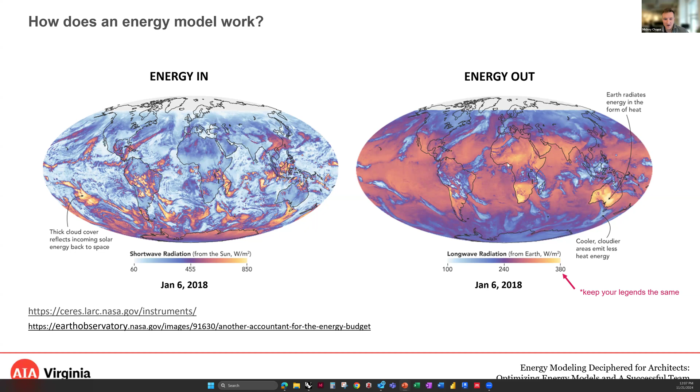A quick graphic tip as we talk about energy processes is I would always recommend to keep your legends the same. What it looks like in this graphic is that the energy out is much more significant. So we're going to touch on that with our energy models, but I just wanted to make a note of that. So how does an energy model work?

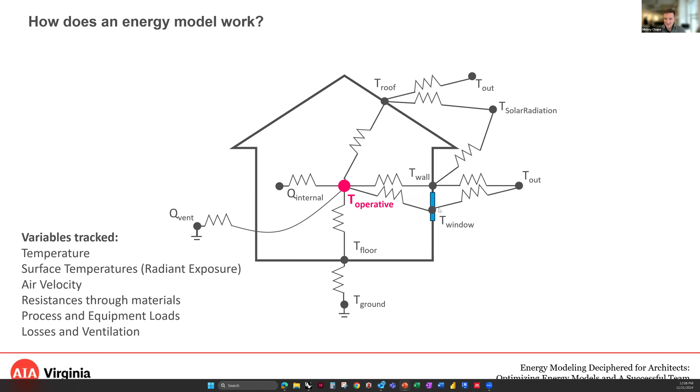We talked about why it's being used. We'll see how it gets used in the design process, but this is a quick graphic to show that an energy model is just simplifying all of the different physical interactions that are going on, whether it's the air temperature inside, the resistances that are going across your building surfaces, and then all aggregating in. And that's including the radiant temperature, the wind speed, the solar radiation that's coming from the sun passing through our windows.

And one of the really important parts here is that it's being reduced to planar surfaces. All the windows are in line with those planes. If you try to make a curved geometry, the software will probably reinterpret that as a bunch of triangulated meshes, and it gets really, really challenging. So an energy model, kind of fundamentally, is not a design model.

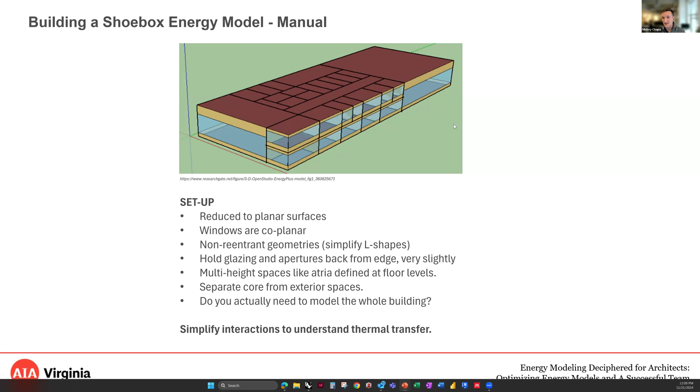There is some processing that has to happen, whether that is done manually by some of the shoebox tools that we're going to show today, or whether that's done by more sophisticated embedded modelers that are now coming on the market. For instance, one of the tools that we're going to look at today is Pollination. This is a development of, again, you can see the Open Studio interface, and this program will work to adapt to different Revit geometry. So this is another path that's out there.

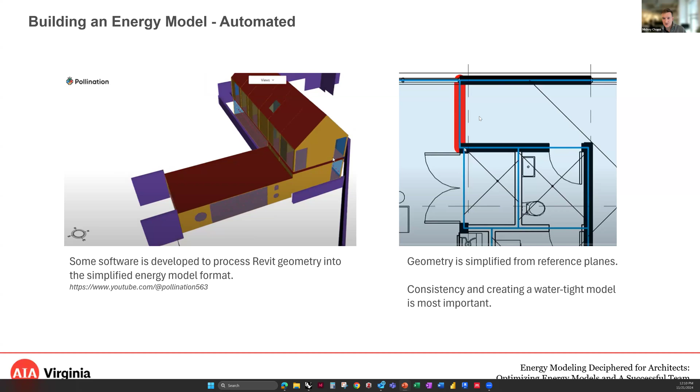We're going to be looking at a much simpler version of this, just to try to get used to some of the tools. And then a key phrase as we go through these models is this term adiabatic. So when we're looking at doing a shoebox model, it's very important to be able to adapt the scope of our study, right? Like, do you need to do the whole model? If you have a 4/1 apartment complex, maybe you just need to do a typical unit at the roof level or at the podium level, and then maybe one also in the middle.

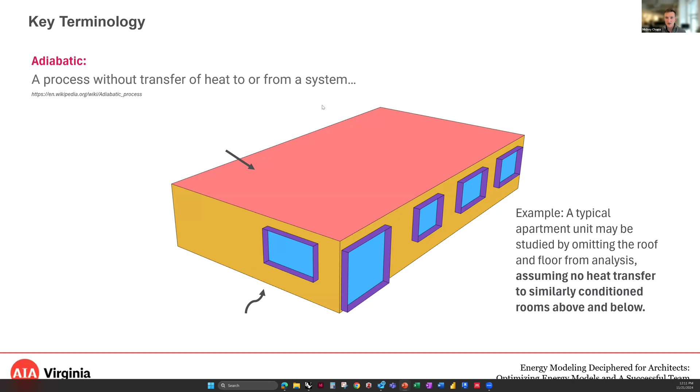And then you can start to test different assemblies as opposed to running a full model, because it takes time. There's actual process time to take into account as you increase complexity. So simplifying that, and maybe turning off some of those spaces. So for instance, this term adiabatic is deciding which walls or surfaces you're not going to be including, that are negated from energy transfer. So it's another thing to think about while we're building a model.

And the other software that we're going to look at today is Climate Studio. I think these are probably comparable in their functionality. Climate Studio has a little bit more intuitive of an interface, whereas Pollination is free and allows you to evaluate the same quantity of information or types of analyses.

So we're going to go through. We'll have to provide these links to folks otherwise, but I'm going to go through the download splash pages for each of these products, and then also these are some other learning resources I'll highlight before we get into our demo. But why are we doing the shoebox model is always key to remember, and also key to deciding on what tools we want to use, and what avenues are opened up for us by the decisions and which tool sets that we use.

So I think, coming from an architectural background, it's very valuable to me to be able to understand where the energy is being lost. Can you connect it spatially to the ideas that you're presenting? Is it going out of these windows? Is it going more out of the floor? For this particular example, I've turned the floor, the ceiling, roof structure off, so we can just check the different faces or walls.

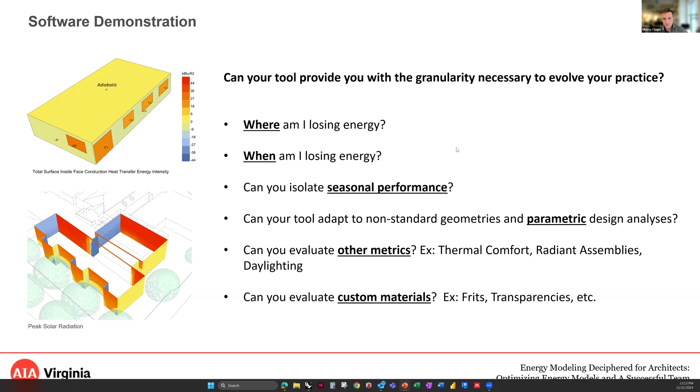Okay, we'll move on to our energy model now. I'm going to flip open some of our resources. Are you all seeing the Climate Studio website? Yes, we see it. Excellent. Okay, so this product is being used by some very sophisticated energy modelers, such as Atelier Ten, other teams, and it comes with a very easy to use interface, in my opinion.

You would go to a download. I would recommend downloading version 2. And I'm going to provide a script that is used. This software interfaces with Revit and with Rhino as well. The Revit exporter is just for daylight, and all of the other energy analyses are performed in Rhino. So I'm going to open up Rhino, and hopefully you're familiar with Rhino and the Grasshopper interface, or maybe someone in your firm, a younger staff might be.

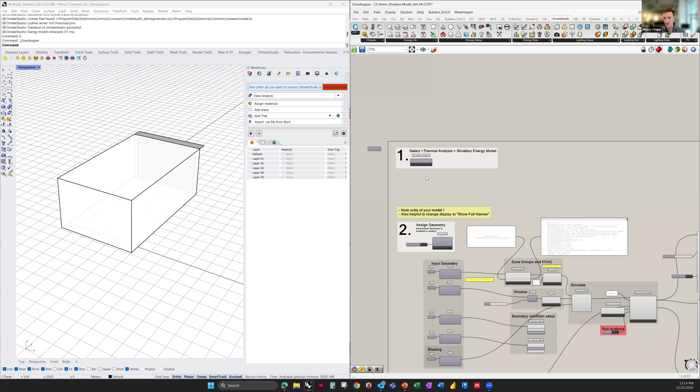At the top, hopefully this is large enough. I'll expand it so we can see. So we've opened up Rhino, we've opened up the Grasshopper kernel inside of it, and we see the Climate Studio. There's a lot of different parts and pieces, but conveniently, this software has a whole template. That's what is included in the top left. You can select the analyses that we want, and there are a lot of different things that we can study. For today, we're looking at thermal analysis, and there is a shoebox energy model. If I select this, we're going to see all of this spaghetti populate onto our dashboard.

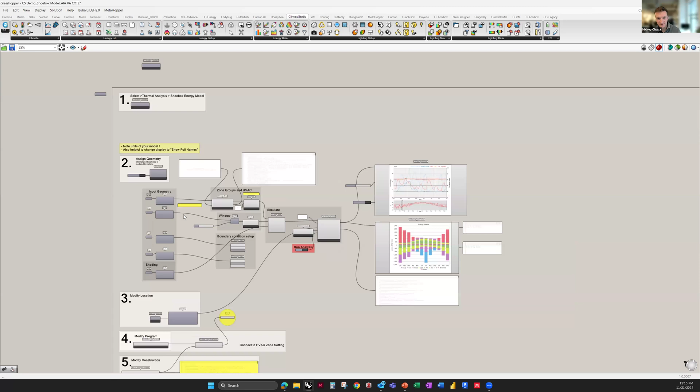Just so you see, very similar. I've added in some other components for clarity in the file that I'm going to share with you all after this meeting, but a couple of high level things of what's included in a digital energy model. Let me go back to our side-by-side view. You have the geometry, the components that you're looking at. All this geometry is baked into this file. We have to assign the windows, the walls, the shading structure. That can be done multiple ways. You can build it up as individual faces, in which case you would have a lot more control over what each of those components are made out of.

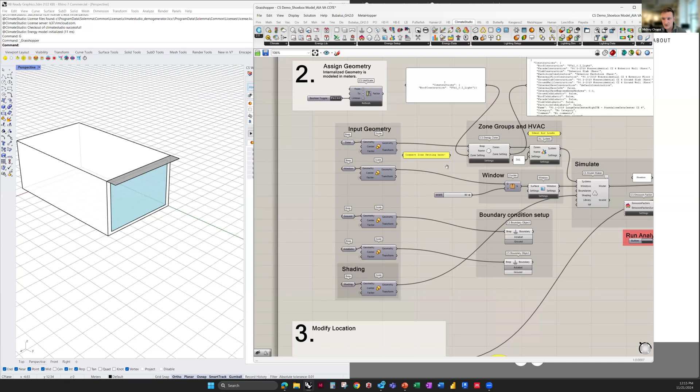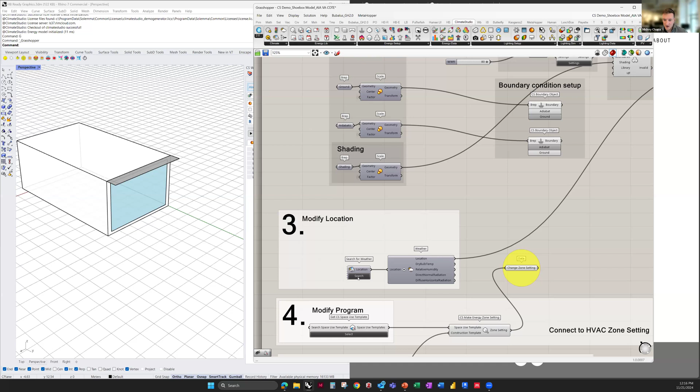But most of these softwares will also have construction sets. We saw that with Sketchbox, so that you could choose an ASHRAE 2019 compliant collection of assembly types, R values and such. And then you also have to identify the location. There is a nice interface where you can click on this button to search for a weather location. Let's say we'll look for Richmond, and we can grab the weather file for Richmond, Virginia. Now that's loaded in.

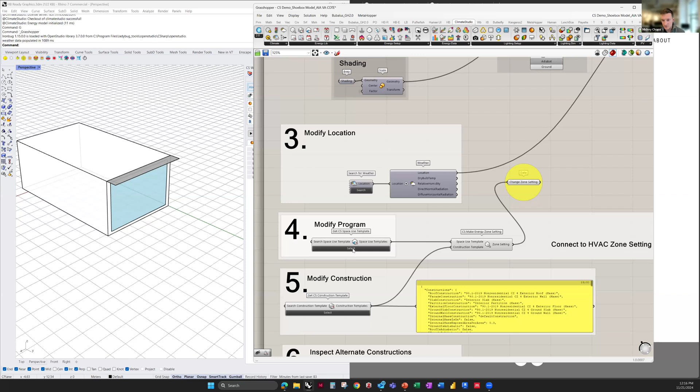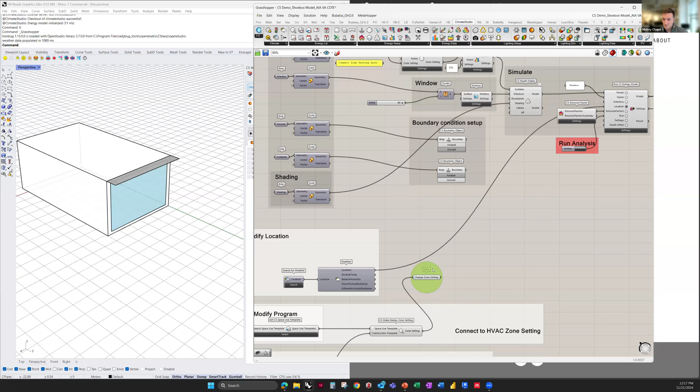We can change the program. For this little exercise, we're going to test just changing a program and what effect that has. We'll do a multifamily residential, and hit OK. And then this zone setting: a lot of these programs, similar between the Pollination software that we'll show next and Climate Studio, have a lot of flow from one element to the next, but so long as you're lining up the names, you can generally search for it and find it pretty readily. If not, there are other tools, YouTube sites that you can look up for the given software. So I've just connected the program that we selected and dropped it into this energy zone.

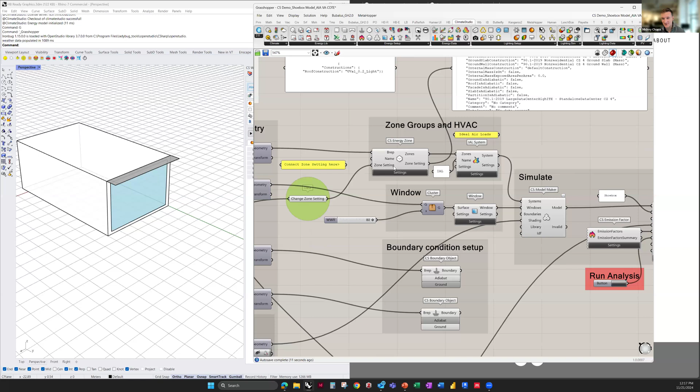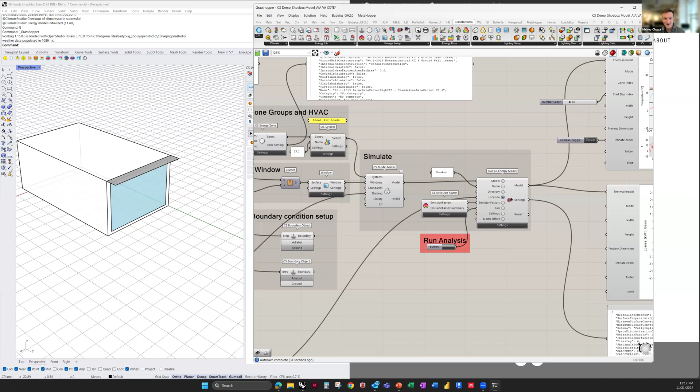If I can't find it, sometimes you can just search for it. So Climate Studio, energy zone, and maybe that pops up with the component that we need. And for this case, all we're going to do is just hit this run button. If it is working, you should get a command prompt that opens up. And in this case, it ran pretty quickly.

So again, within a couple minutes here, we have some test geometry. We can start to look at different performance qualities of this space with a very large window, and its energy balance. So this was the quick note that I made about the globe and the energy in and energy out. So an energy model is balancing losses and gains,

and then for the particular systems that we're looking at in a shoebox setting, if we don't have the exact building systems that we're going to use, that's probably another package that we could look at in one of those other template files. But this is just what they call an ideal air system. So it's assuming no energy is created or destroyed, and you're just tracking the gains and losses across the envelope or across the building systems.

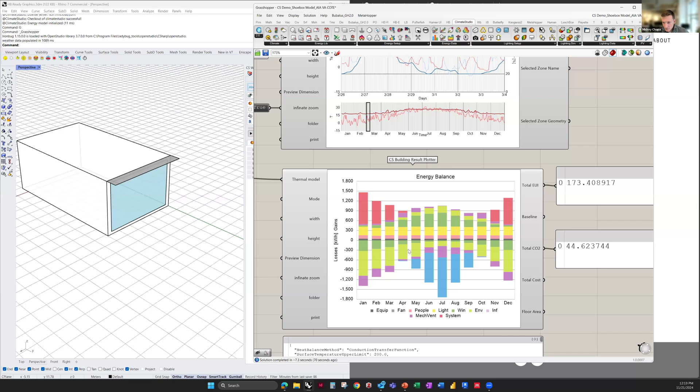And then you can start to identify the biggest transfers of energy. So we have heating, we have cooling systems. In this case, the environment and infiltration should be pretty high for the residence. But now if we compare that, sorry about the back and forth here, this is also probably looking at it in metric. It is looking at it in the metric EUI.

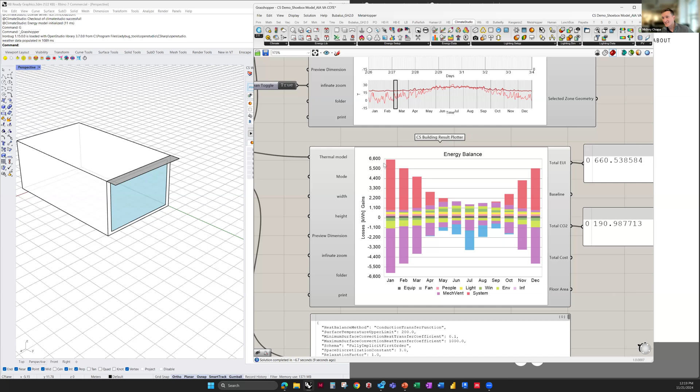However, for the sake of looking at this, we can just compare it relatively if we change the program, let's change it to a science lab. And then rerun it. So this is calculating in the background. And then we can see a much different energy spread. The last one maxed out about 1,500, and now this is saying 6,600. So we have a 4 or 5-fold increase in energy use by program.

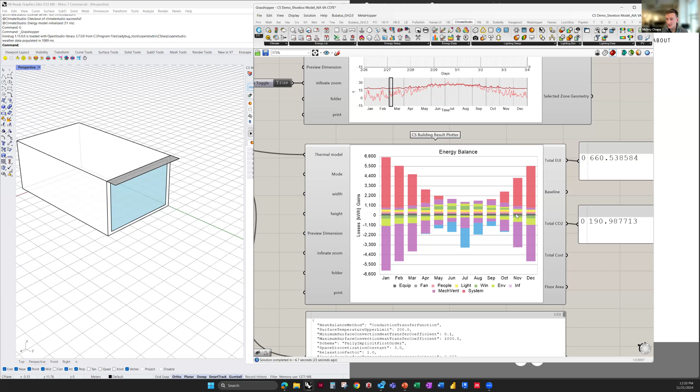So again, things that we know, but now that we can see this, it can help us make recommendations and dive in deeper seasonally and based on different components. So that's Climate Studio very, very briefly. So the next thing that I want to open up is a Honeybee or a Pollination script. So where do we get that?

One last thought on Climate Studio. There's this really wonderful course that's put on by the team that developed that software. It runs March through June. It's like $200 for the full course. Really high level comprehension of sustainable building design. Definitely recommend.

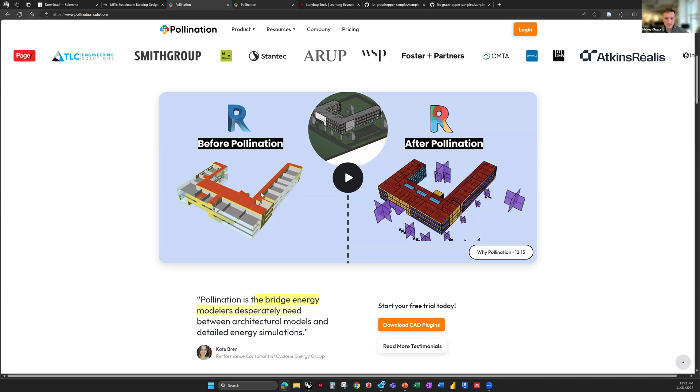Next is this Pollination software. In full disclosure, part of the team that developed this software came out of my office. So I'm very grateful to be a part of this community. But again, I'm happy to share this with you today because the tools that they have baseline are free. And then there are a lot of other things that can be added on with cost. You have to create a login to see this next collection of tools.

But when you log in, there's a download section. When you create a login, you'll get a free trial to begin with. So the Grasshopper plugin is free and open source. Hopefully, if you have students or new hires that are just out of design school, they're teaching this in the universities now in environmental building systems classes, just because the cost barrier to entry is so low.

However, there are a growing number of tools within this group that are available as plugins for Rhino and for Revit, but we're just going to look at the free Grasshopper ones today. And what are we looking at? So in this family of tools from the Pollination set, there's this collection of animals. Ladybug is the climate analysis software portion. Honeybee is the energy software. Dragonfly is an urban energy modeler, if you're looking at district systems, just pretty fascinating. And then Butterfly is a very simple CFD interface.

So inside of this tool set on this resources page, there are some example files. And again, this might be a little overwhelming. This is going to redirect you to a GitHub page where you download it. So not quite as slick as the Climate Studio templates package, but there are a lot more of these scripts that are available online and designed around very specific analyses.

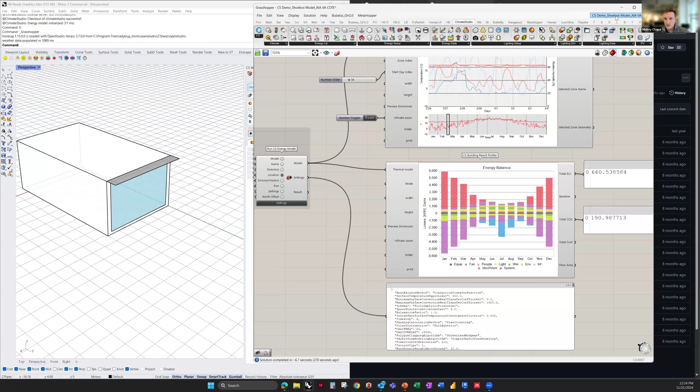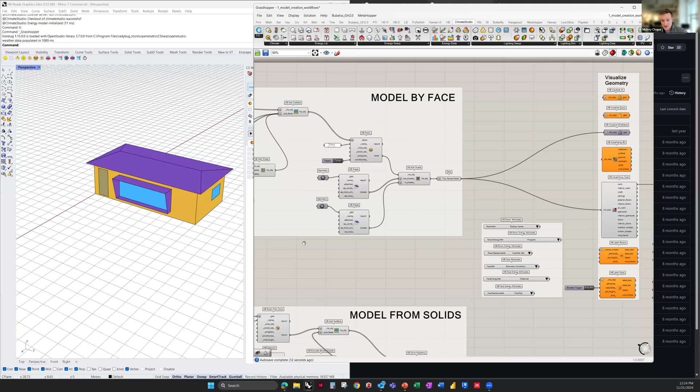So let's go back to Grasshopper in our Rhino interface. And this is the model creation. So just like in Climate Studio, we see the same coloration of the Open Studio faces, so we know that that's kind of running in the background. And we can model that by individual faces, so we can have a lot of control over, this is actually like the walls, the windows, the shading.

And then this is one of the things that I think is really important for architects. We're just never happy with the black box situation. Like some of the other tools that are on the market, you don't know exactly how that is being processed. With software like this, you do know, at the cost of making sure that you are really in control of all of the different pieces, which takes time and experience. But it does even allow you to change different Radiance parameters. So that is the ray tracing software.

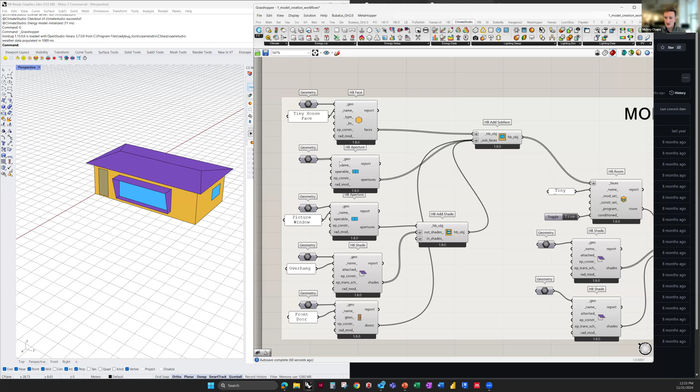Also note on the download, when you download Ladybug or Honeybee, it's going to download Python, it's going to download Open Studio and Radiance, which is the ray tracing and light tracking software that's kind of underneath all of these other tools. And sometimes when you do download it, it may take you opening Grasshopper once or twice as it loads in those different background softwares.

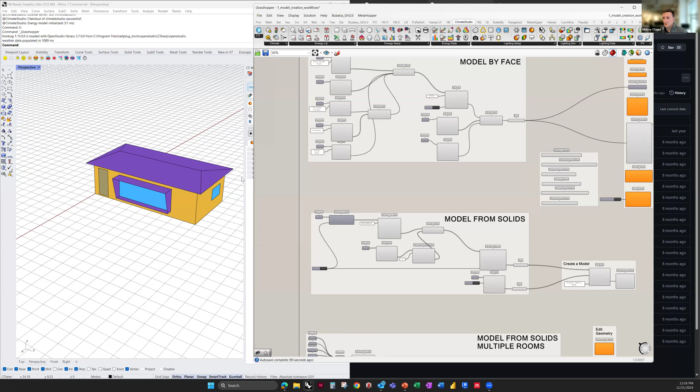So in this case, this energy model, we're looking at one that's designed by face, which is, again, just like plane by plane construction, similar to how we saw in Climate Studio. And then this model from Solids, that is if you just drew a box. Let me see if I can turn this off real quick. If we just had a box and all of these different little rooms inside of it, what does that look like? So again, slightly different collection of geometry that was included in each of these little sample files.

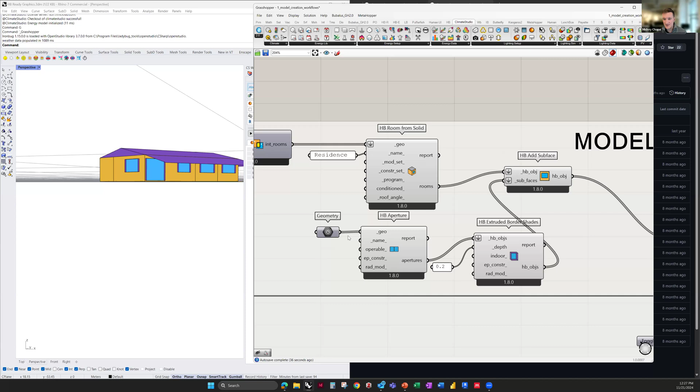But what we're looking at here, just to walk through the spaghetti again, is we have our geometry that's being put in. It's being translated into this Honeybee room object. Similarly, there's this collection of modifiers. So we need to add the location, we need to add the constructions and the program. So these are two different methods for attacking the same questions and the same line of options. In this case, the geometry for the windows is extra planes that are added coplanar with the surface of the box. It's a really important thing.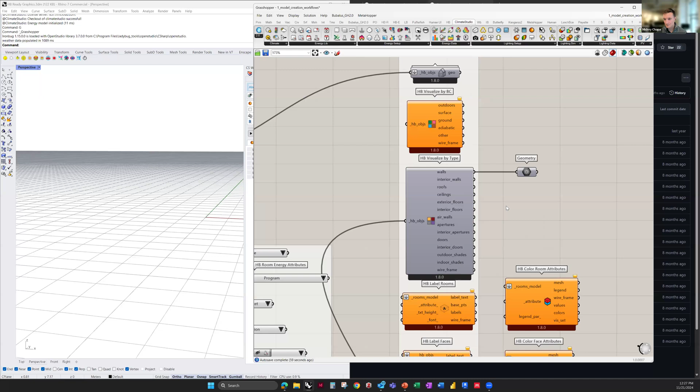And then we can inspect the different elements. So I'm going to go back to, let's see, I just want to make sure that my windows are not showing up. So I'm going to hide this piece. And I just want to look at the walls. So this is one way I can make sure that I know that the windows are being cut and tracked through. So you'll be shared this script. This is a lot to take in all at once, but I just wanted to show you some of the functionality that is available in these free tools.

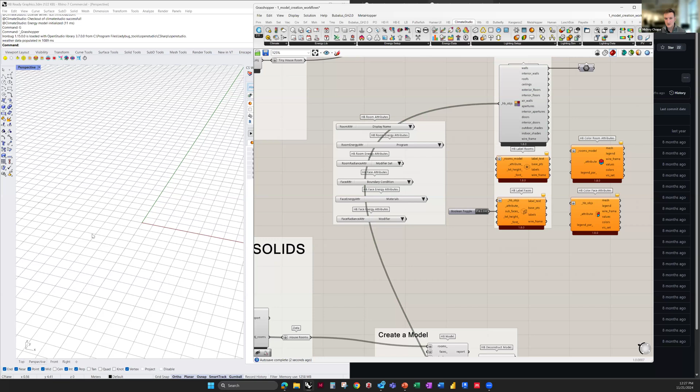And then another method that is presented in this sample file is, how do you do a whole floor? If you're like, okay, well, I've really dialed in different space types, different orientations, then you can connect lots of rooms together and then start to process a whole energy model. In our practice, and we'll talk about this later, we do this very rarely. What we would be looking at are just smaller shoeboxes, like one room, maybe a key atrium or signature space, or a really dynamic space from a thermal perspective.

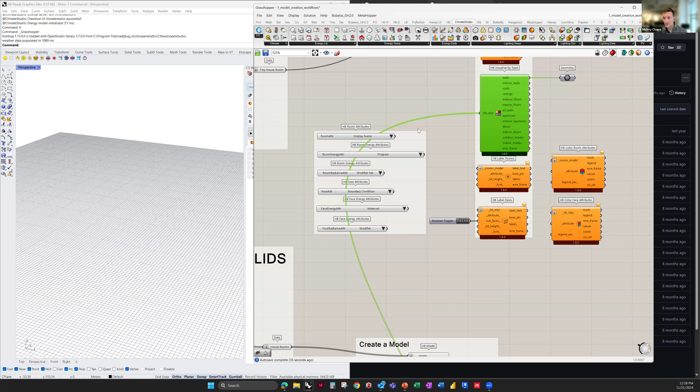So, okay, this is a file set up just to show how you build the model, how you put it together, and you'll get a copy of this. So secondly, now I want to show you how you go through and add some qualifiers, put some adjectives on these spaces and walls and things.

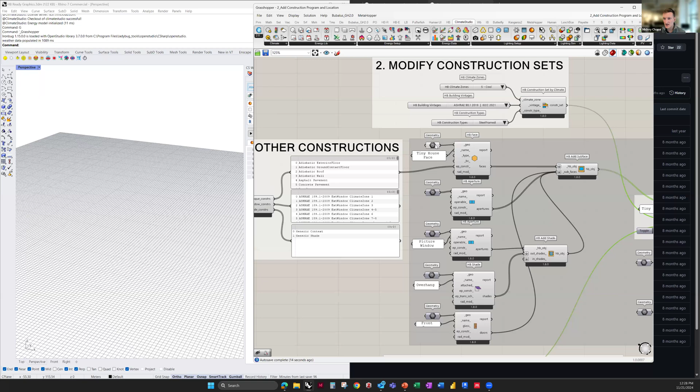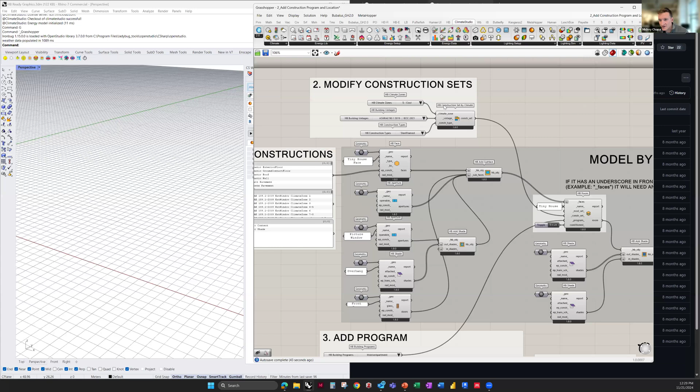So if we were looking at, let's find our model again, just our little tiny house example that was presented. Again, this is a shoebox energy model, and I've just added some comments on here, so if you have the time, you can go through and look at it. But we have the different faces, the windows, and we can add qualities to that. So one of the ways that you can add a characterization of your model is through this construction set.

And within here, I think I was doing a demo in the Boston area. So we can change the climate zone. We can change a building vintage. I think the ClimateStudio tool only had the current ASHRAE model. I think this is a really nice tool if you want to compare an existing building. It has a lot of historical time steps in there, and then also the construction sets.

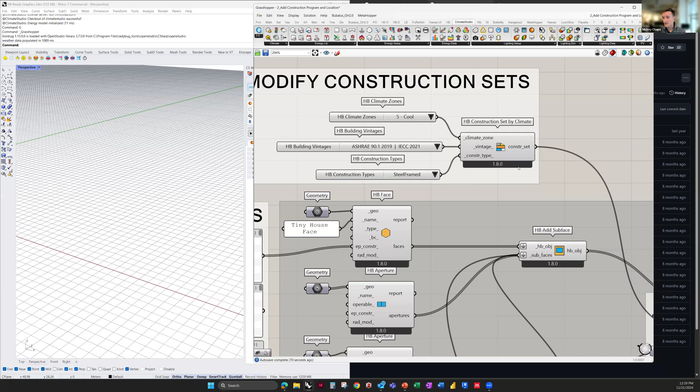So a little less clean of an interface as compared to Climate Studio, but again, I think very valuable in terms of its cost, and it's free. So as we track through here, we have some different properties. We have construction sets. We can change the program. In this case, we'll do the same analysis. I have this one set up so that we should be looking at it in imperial units.

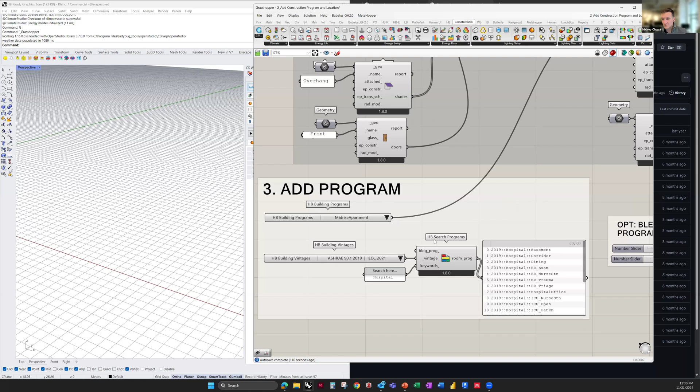And the Honeybee tool set also has this search feature where you can look at all of the other programs. It kind of works the same way. They have search programs, search construction types, search individual materials. So if you dive in, you can look at building up your own assemblies, and having the facility to do that I think is very, very helpful.

So then all of those constructions and programs get applied at the room level. And then shades can be added. Context buildings are also included in the shade. You can choose whether they're attached or detached. Okay, so that is how to set up the model. And then the simulation, this is, again, probably in the weeds. Hopefully you'll have a chance to go through and look at some of these other resources.

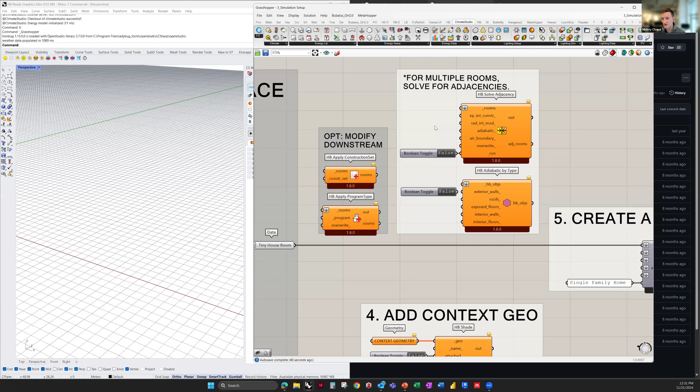If you had multiple rooms, you would have to pass it through this adjacency component, so the software can know which rooms are touching, and then you can decide, maybe it's a multi-zone open air cafeteria or large atrium space, whether or not it has an air boundary. Does it actually have a wall in between or not? So this allows you a high level of flexibility and functionality to dive into how your model is working. Again, adding in shades.

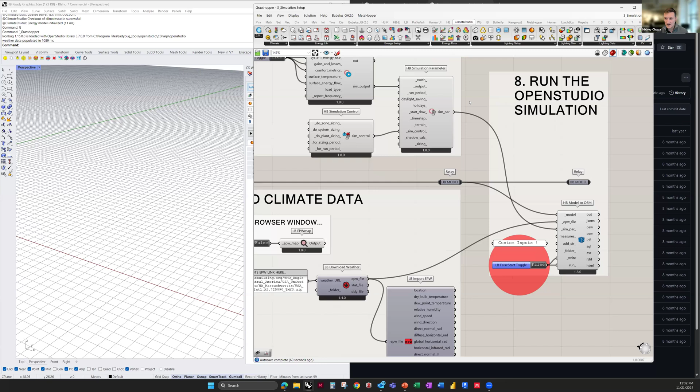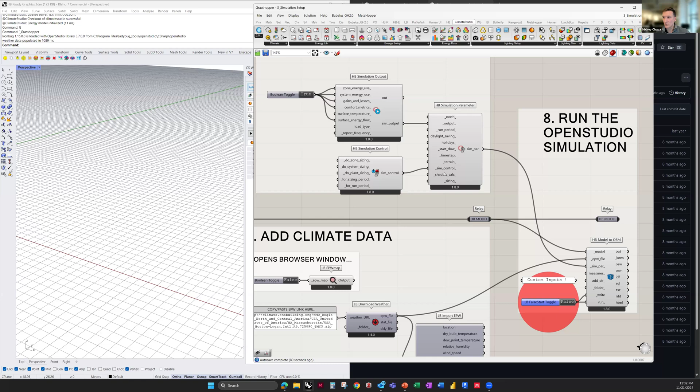So you go from a room into a model, and then it gets passed into this OpenStudio model, this OSM feature. And in this case, you can control not only very standard generic processes, but what you want to analyze, whether you want to do the zones, or if you're specifically looking at the energy flow. I showed that graphic of heat flow through windows or heat flow through walls. So you can choose whether or not you want that included. Maybe this is too much detail for your particular practice, but I do want you all to be aware that this is out there.

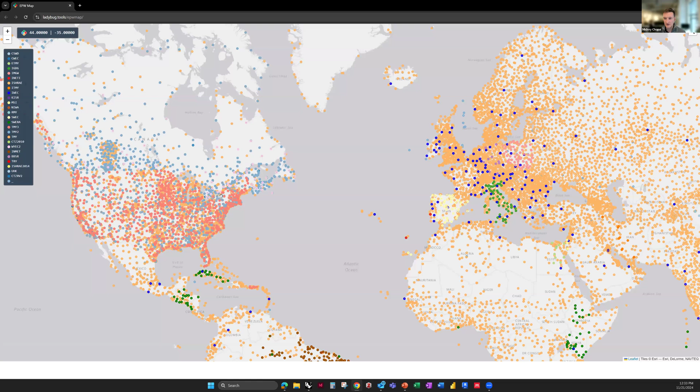This is also a pretty interesting thing. Climate Studio had a nice graphic where you could just search for climate files. Ladybug has an online service; this should be opening up my browser window to a map of climate files, hopefully quickly. There we go. So we could click on any one of these places anywhere in the world that have documented their climate data. Another really useful feature. And then you can inspect it with other Ladybug tools for hourly and monthly averages, that sort of thing.

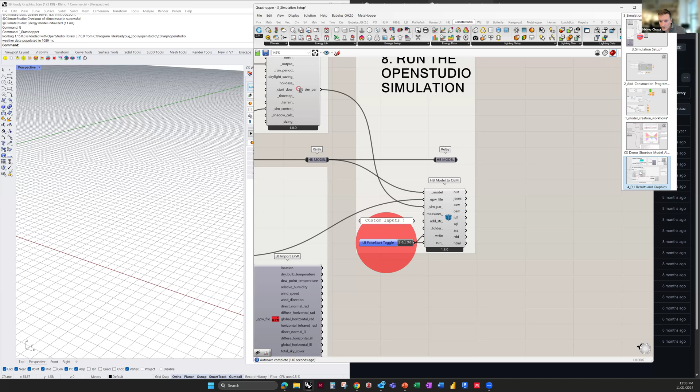So that's the setup, and then we could run it, and we'll look at it as we come to the end here. You can see I have an analysis that's already been run, but we set this to true, we run it, and it does the same thing.

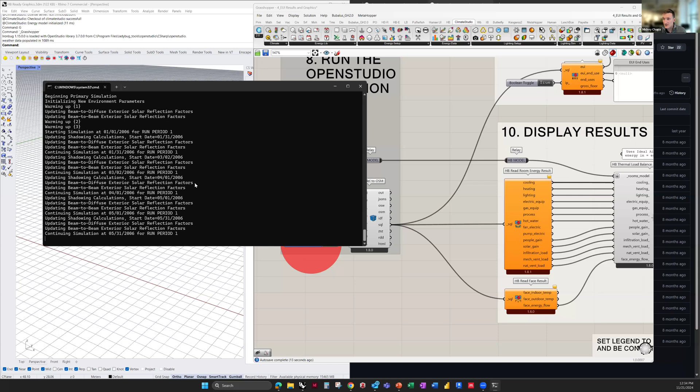I can turn it off, I can run it again just so you can see as an example. And again, it's kind of loading everything in the background. Hopefully this doesn't take too long now that I'm also streaming this video here for you. But yeah, you can see again, it's processing, it opens up a command prompt. And then, still thinking, here we go. So same thing.

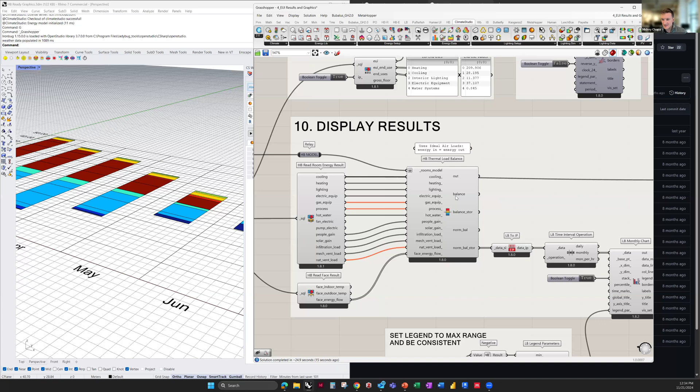And then this tool also allows us to really dive into what are each one of these loads, and how much are they. Honeybee also collects the data into these little packets where it works kind of like a database, if you're familiar with database design, where there's a header and then a long list of data items. And so if you want to look at the data, it comes in as this hourly collection, 8,760 values, and that's every hour of the year, and some information about it.

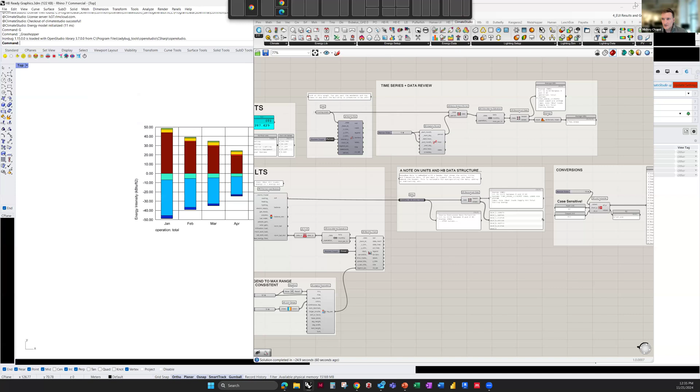And then these are the loads in particular that are coming from the cooling in kilowatt hours. So, you could use that, compare it to how many kilowatt hours you're collecting from PV panels. So a lot of functionality within here. There's some other little notes in the margins, but when we look at our model, then we can see the same thing. Let's see if I can make this full screen and have the same level of detail pulled from that.

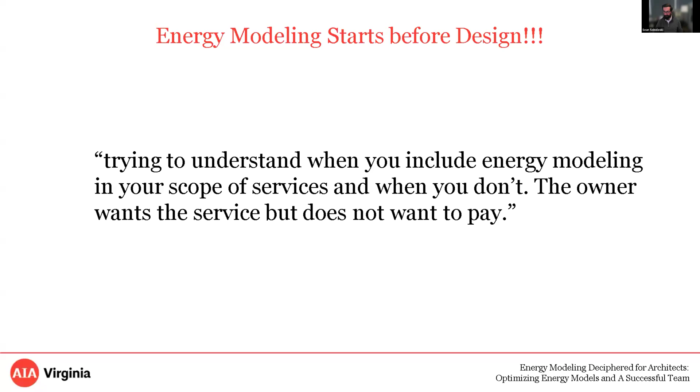And what that really means is, we have to understand how do we use energy modeling from really early design analysis with massing studies and the demos that Mickey provided with simplified modeling. And I'll point out, you'll hear me use simplified modeling. That's really interchangeable with shoebox modeling, really intended to represent early phase design energy analysis.

But as you move through design, you have load reduction modeling, life cycle cost analysis, and you get into higher performance analysis with geothermal well field sizing, net zero energy design, sizing PV systems. And then you could use energy analysis to help pursue utility incentives and even demonstrate compliance for energy code purposes. And for those of you that have worked on LEED or other third-party certification, energy modeling can come into play there to help earn points.

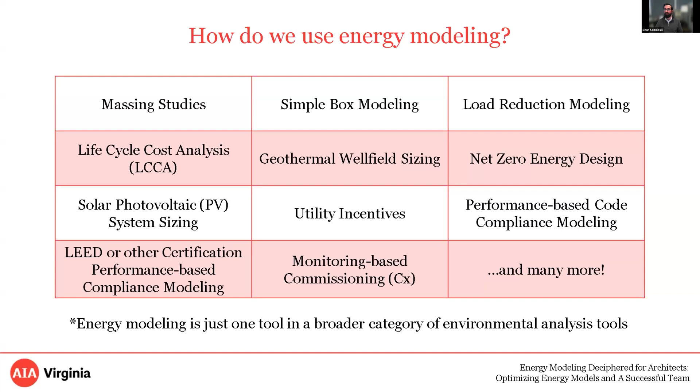And beyond design and construction, you have monitoring-based commissioning, which energy modeling can play a part in. And there's many more applications. I think it's also worth noting that energy modeling is actually just one tool in a broader category of environmental analysis tools. But today we'll be focusing on energy modeling. And I think that recognizing project-specific requirements is important in helping identify the analysis tools and team members that are going to be necessary to fulfill the project requirements, goals, and any targets that have been established.

From an engineer's perspective, I can tell you that at a base level, going into almost every project, understanding the energy code implications of the scope of work really drives the conversation of, are we pursuing prescriptive or performance-based compliance? One example I'll use is we had a particular project where an architect wanted to pursue a design that had a really high glazing percentage that was above the prescriptive allowances, and that shifted the project scope to necessitating an energy analysis. And as I mentioned, third-party rating systems and pursuit of any sort of sustainability certification.

You can have integrative process credit, for example, from LEED that specifically requires simple box energy analysis early in design. Late in design, you also have the option to pursue prescriptive-based compliance or performance-based compliance. So these are additional considerations when you start to consider a project scope.

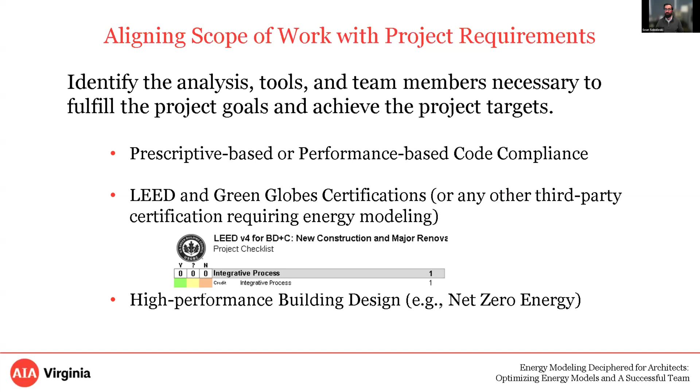So now, excuse the wrong way there. Now diving into modeling cycles. So as I mentioned, we're going to broadly cover energy modeling cycles from design through construction and then into post-occupancy. ASHRAE, the American Society of Heating, Refrigerating, and Air-Conditioning Engineers, published Standard 209, which defines the modeling cycles through these phases.

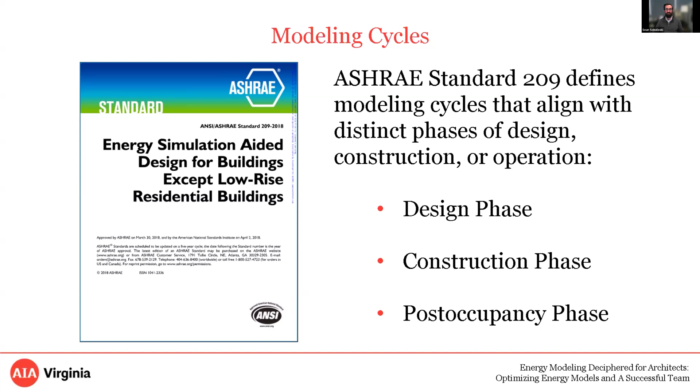Starting in design, there's 7 different modeling cycles that span from conceptual design all the way through construction documents phase. Starting in conceptual design phase, we have simple box modeling and conceptual design modeling, which transitions into load reduction modeling. And we'll get into these in a little bit more detail. In my practice, I would describe these first 3 cycles as generally what the broader design community would consider simple box or shoebox modeling.

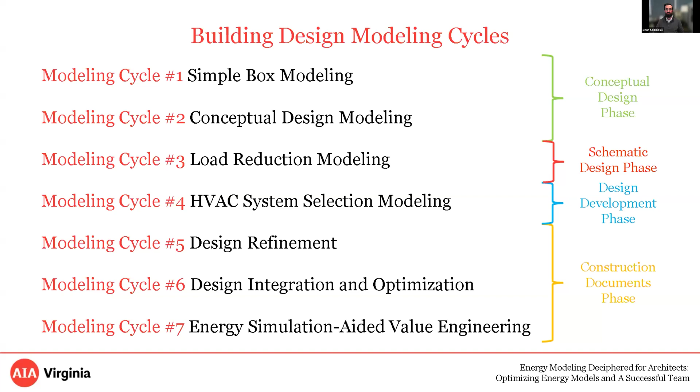And then further transitioning into design development, we have HVAC system selection modeling, and this typically supports life cycle cost analyses. As design continues into construction, we have design refinement, design integration and optimization, as well as energy simulation aided value engineering. So looking at these first 3 cycles, simple box modeling is really when we're first evaluating building geometry and site orientation. And again, I think there's certainly a lot of overlap between these cycles.

Conceptual design modeling, maybe once site orientation's nailed down, is really intended to represent when form and architecture of the building are in development, right? Are we looking at a rectangular form or an L-shaped building? Have we started to think about the envelope construction types and performance, which then transitions into load reduction modeling and really starting to hone in on reducing annual energy use and heating and cooling peak loads with thermal performance values and other load reduction strategies such as shading.

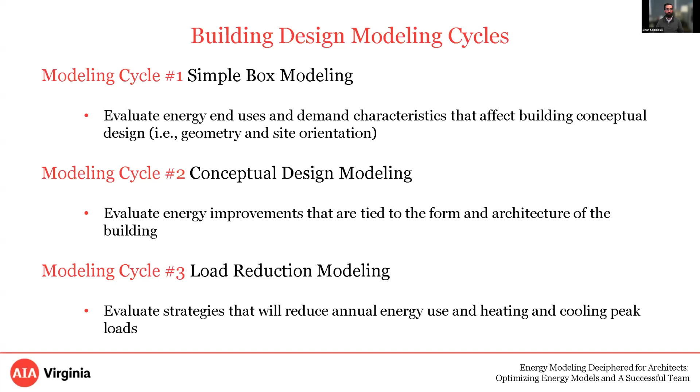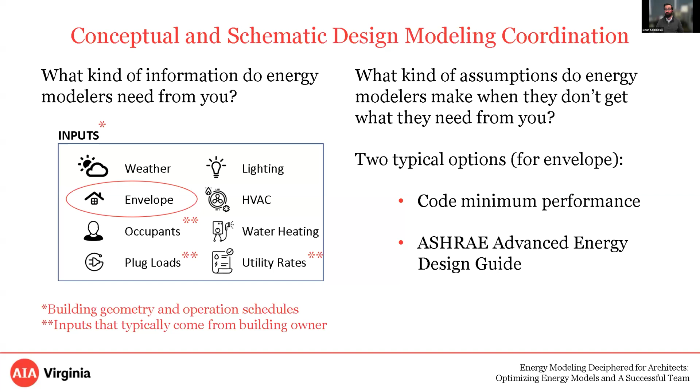But what happens if the design is at a point where you don't have answers, particularly with respect to the envelope? My typical approach would be starting with code minimum performance. And another resource that I highly recommend is the ASHRAE Advanced Energy Design Guide. The code's pretty straightforward, and it's always a great fallback, particularly for new construction or addition work. Right here in Virginia, the current energy code, you can pull all the opaque assembly performance values and fenestration performance that would be required. And again, high performance building design is becoming more critical with climate continuing to be a focus.

ASHRAE has published advanced energy design guides for various building types, and they range from a 30% energy guide to 50%, all the way to what I would describe as 100% of the way towards zero energy. And they're free from the ASHRAE website. I've provided a link, and they're really valuable. They provide numerous recommendations on strategies for achieving high performance building design, including envelope recommendations, targeted U values, R values, solar heat gain coefficient values for high performance design.

And I often turn to these guides as a resource for making recommendations, because at the end of the day, I really want to stress these envelope performance values are really an energy model input that needs to come from you all, because you're the ones ultimately responsible for designing the envelope. Because if I had it my way, the glazing percentage on most buildings would probably be a lot lower than what most of you would desire.

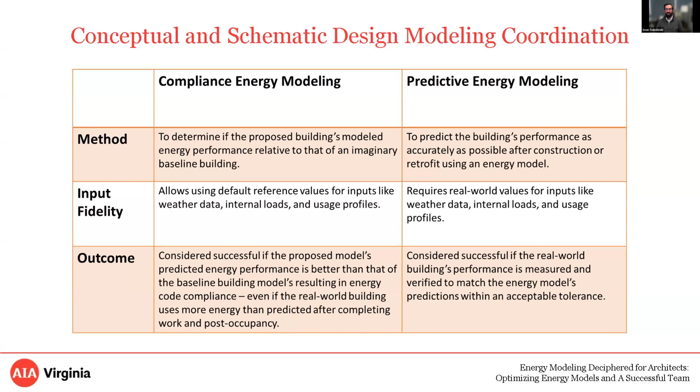So another graphic I wanted to reshare from Ajit's previous presentation was this side-by-side comparison of compliance and predictive energy modeling. Just to re-illustrate, compliance energy modeling is really talking about LEED energy modeling, where you're comparing your proposed design against a fictitious baseline to evaluate the performance to achieve some amount of points towards a sustainability rating. Predictive modeling, on the other hand, is high performance design. How is the design actually going to perform in the real world?

So going back to how the owner is ultimately responsible for providing operation schedules, I just want to juxtapose with compliance modeling. A resource that I would lean on for operation schedules, again, is the ASHRAE 90.1 Users Manual, which provides typical operation schedules for various building types. And this is a great fallback for compliance modeling, right? It gets the job done for a LEED energy model.

But when we really start to talk about high performance building design and you're targeting net zero, it's critically important that the building's actual operation is accurately captured in the analysis. And that's where it's important for you all, as typically primes on the job, to recognize that this is a really important coordination item, that an owner really needs to weigh in on the anticipated operation of a project.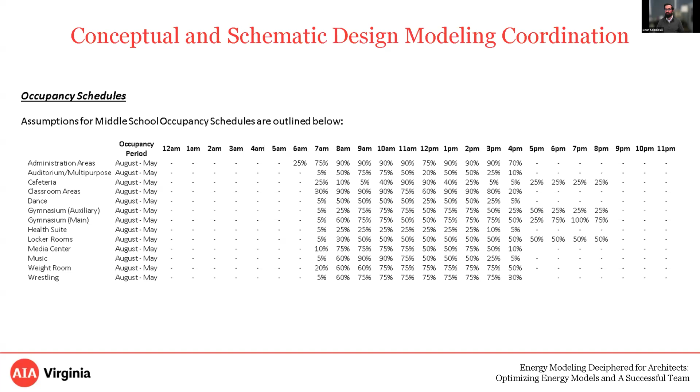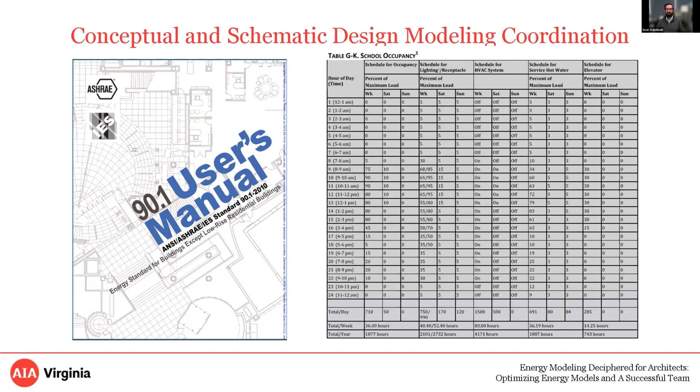And here's just an example. Middle school, we worked with a project owner to understand the anticipated operation across various space types. And to just jump back, right, the default school occupancy here from the user manual, it's one occupancy schedule that's intended to be applied across all space types, which really lacks a major degree of precision when you're talking about developing predictive energy analysis results.

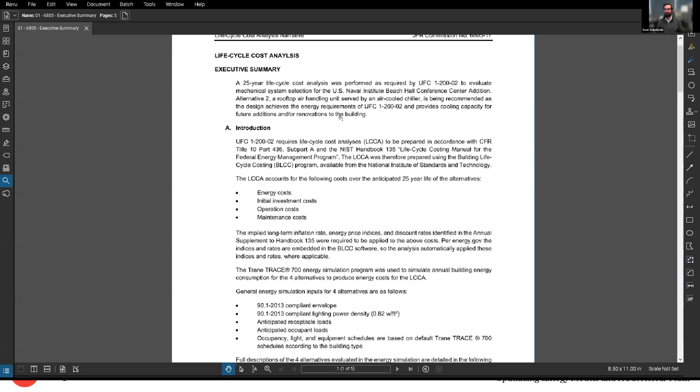So moving on in design, this brings us to design development and HVAC system selection modeling. So as I mentioned, this is really kind of where we get to life cycle cost analyses to compare different HVAC system options that are still being developed. And I'm going to quickly share here just an example report. I'll zoom in just to illustrate what you might expect to see from an engineer.

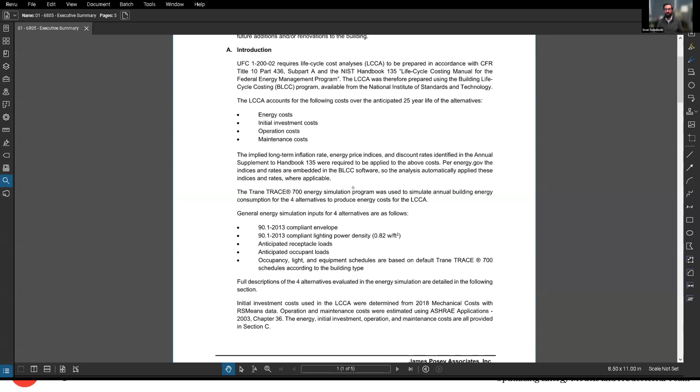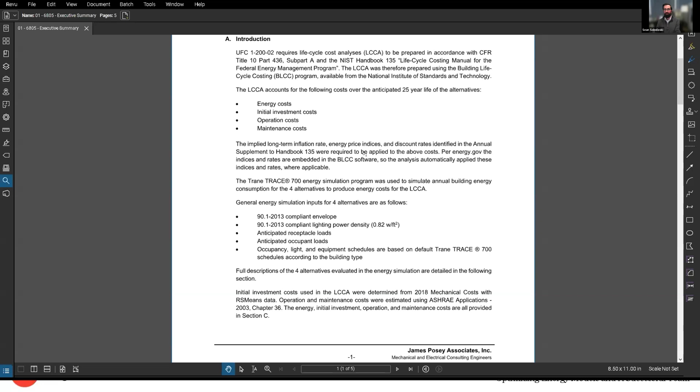So it really provides a brief overview of the project, kind of high level discusses the inputs that went into the model. Again, with a life cycle, we're ultimately trying to inform system selection. So all of these inputs for internals are held static because it's really about understanding the difference in performance across the various systems, which is why as we move through the report, we define what the different systems are that are being evaluated. Here's a table representation of those systems and how they vary.

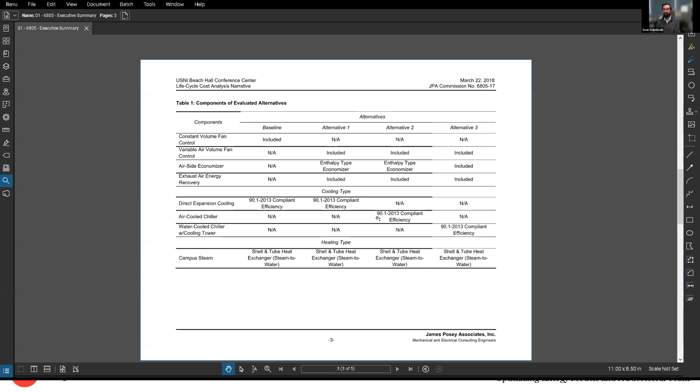The report then gets into the different costs, right? We have energy costs, the initial equipment investment costs, the ongoing operational and maintenance costs, which leads us to ultimately the results. And for this particular report, we had a supplemental ASHRAE 90.1 compliance calculation and ultimately our recommendations. What would typically accompany this report are all sorts of input and output reports from the life cycle cost analysis software, as well as the energy modeling software, and all of our supporting calculations for the costs. And I'll mention that included in all of that would actually be EUI data.

I can tell you that I as an energy modeler often get a slew of emails towards the end of the year when you all start tracking down your AIA reporting data. So it's something to be aware of, that data is often in reports that you might have received for a particular project. So I'm going to quickly hand this off to Mickey.

Sure. Thanks, Sean. And just with that, from the architecture side, we're always going to be looking for the EUI for the reporting, but that's not the only consideration that we have. Are you also providing a water budget? Do we know how much water is being collected by the site? And that seems to be also within the realm of the MEP engineer or the energy modeler to be able to collect for us and to express for the project whether or not certain systems are appropriate. Maybe if you have a cooling tower, right, that is going to be part of the energy systems and resources that are available for the project, the budget.

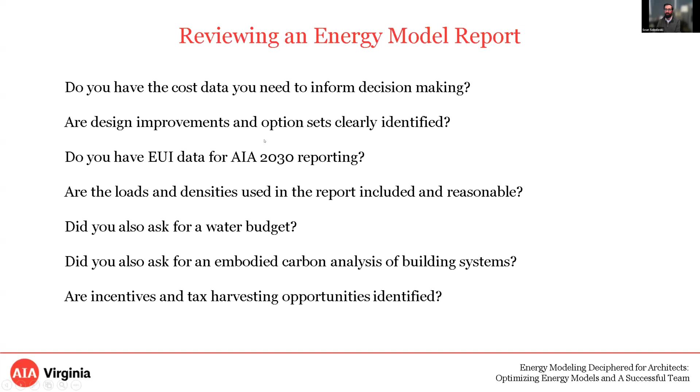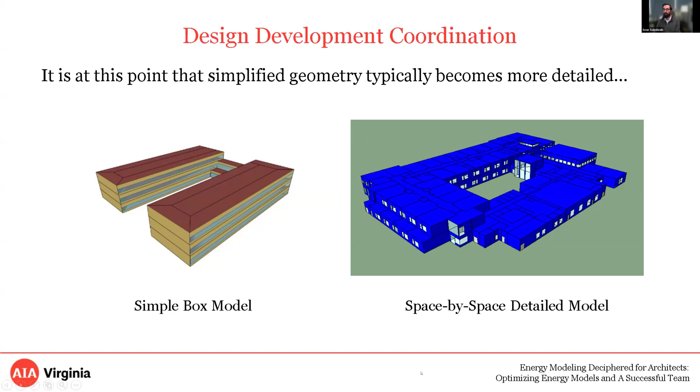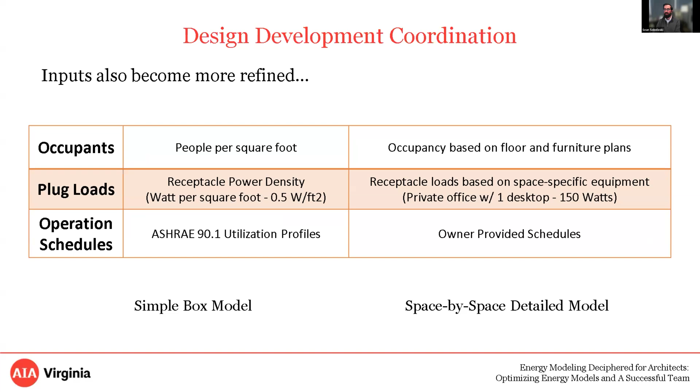Mickey covered some great demos for simple box modeling. We're at this point transitioning from SD into DD and CD. With simple box modeling, typically you see really simplified geometry, and it becomes much more detailed when you shift to space by space. Along with that, a lot of our other assumptions get refined. Occupancy, plug load, you go from very general assumptions for simple box to very detailed assumptions for the more detailed models.

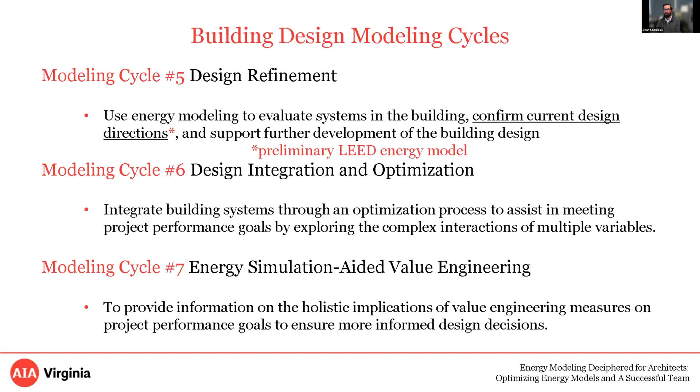With the shift into construction documents, we start to get into design refinement. I would describe this as a preliminary LEED energy model. If you're pursuing LEED, this is a really good time to check in with your energy modeler or engineer to see if the project's on track with the LEED certification target. Design integration and optimization, as well as energy simulation aided value engineering, are other great construction document applications, which ultimately brings us to as-designed energy performance, which is really taking the final design documents. That's ultimately what a LEED model typically represents.

Additional cycles: energy analysis can be used to support change orders. And then after construction, as-built energy performance. Any changes that resulted through construction could again be captured through energy analysis to provide a predicted energy analysis of a building before there's actual operational data.